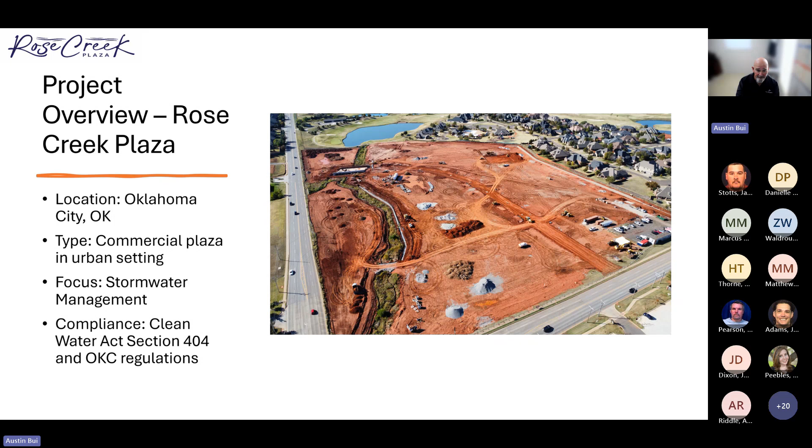The permitting process was long. Coordination with city departments took quite a bit of time, but once we got the stormwater plan into the city, it didn't take much time to complete the permits. The wins were streamlined approvals through proactive communication with the city and the Corps of Engineers, ensuring timely permit approval by getting everything done early and aligning project goals with city standards, which was crucial to keep things moving forward.

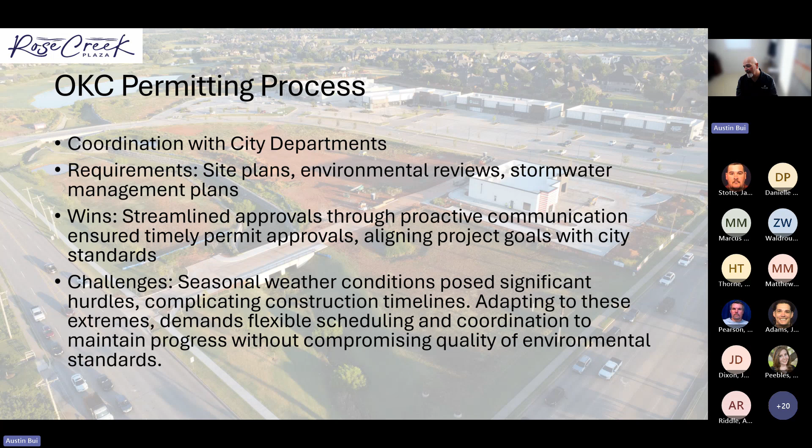Some challenges were the weather. We have seasonal weather here in Oklahoma - tornadoes, hot dry dust, torrential rains at times, and hail. We have a whole host of things trying to stand in our way. They pose significant hurdles, complicating construction timelines, but adapting to these extremes demands flexibility in the schedule and coordination with subcontractors and the city, so you have to maintain quality without compromising the environment, and that's where these standards really play out for everybody in the industry.

The Clean Water Act, Section 404, covers wetlands and upland sections of the permitting, and permit impacts to water downstream. Water that feeds out of this site feeds into the settlement ponds, feeds downstream, eventually getting into the rivers, and then ultimately back into a river, a lake we use for water, or back into the ocean. The environmental assessments, mitigation plans, and the U.S. Army Corps of Engineers gave us all the information up front, as well as the DEQ. The outcome is full compliance with minimal ecological disruption.

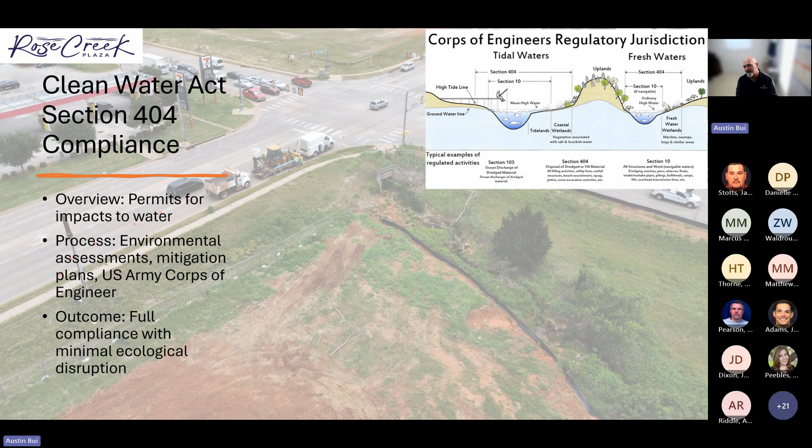The stormwater quality inspections are frequent. If you know about your stormwater compliance book, after every rain event of half an inch or more, you have to fill out your inspections. You've got to make sure you didn't have sediment leaving the job site. Regular inspections for runoff control are typically done by the on-site superintendent, and by the city or the state.

It's really about whether things are going to work out good for you on your job or not. We didn't really have a lot of play in our job. It was so big that we had to keep everything in place at all times.

If you look closely at the picture around the creek, it gives you a lot of details. As it runs down towards the bottom of the picture, it runs into the settlement pond at the country club, right under that little golf cart bridge. We had to silt fence all the way around the creek, all the way to the bypass crossing that we were allowed to put in to cross the creek.

Under the permit guidelines, you only have a small section of creek that you can work in. They gave us 20 feet on each side of the bridge to use as passage from one side of the creek to the other. We used sediment traps with monitoring throughout construction, and had to build settlement ponds throughout the construction process and then move them - it was quite eventful.

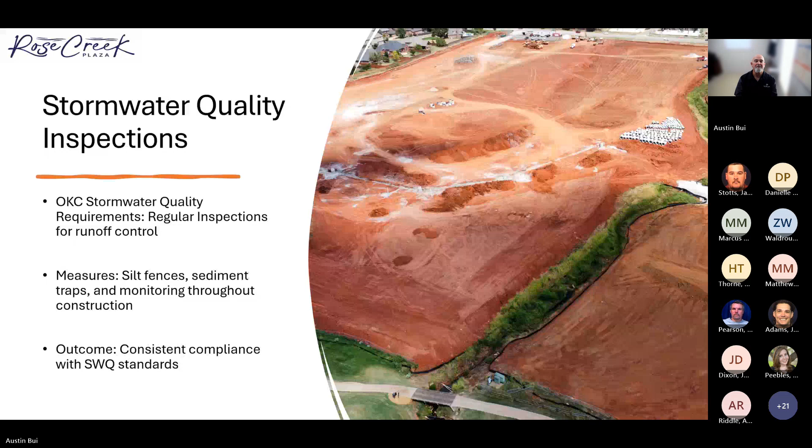Challenges - man, this job was challenging. There's a lot of complex terrain. When we got here, the creek was the lowest spot on the whole job, probably in some areas 12 feet below the level of the closest street, which was 164th in the top left picture, and that creek was probably 10 to 11 feet below that level. We had to bring that all up to level while maintaining the creek.

We had to run diversion channels through stormwater culverts to channelize the water while we did the build. It was very time consuming. The topography, the steep slopes, the flood prone area collecting water from the other side of the street with another site coming in, created a high risk of flash flooding. It was quite a build.

Well, we managed to get through it. Limited space for the infrastructure was really critical, so we had to pace ourselves on this job.

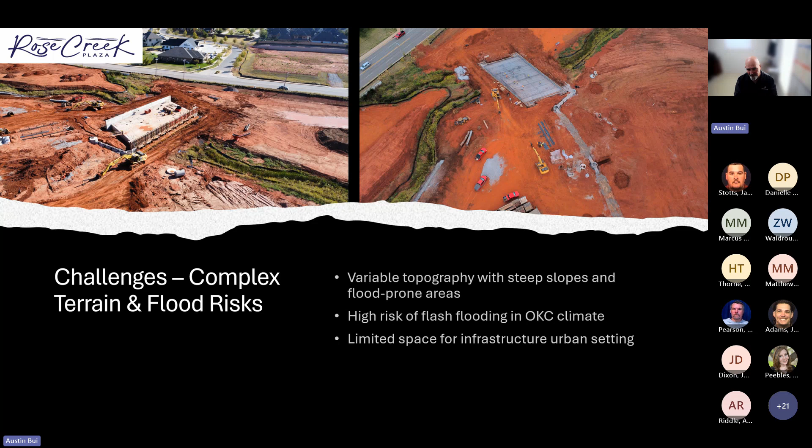Challenges in compliance and community were crucial. We had a lot of feedback with the community and prior knowledge of what they were going to require from us, balancing federal and OKC regulations, addressing neighbor concerns such as noise, traffic, mud, and dust control. These people didn't want to see mud getting on their brand new cars, or dirt coming out of the bottom of trucks while driving their kids to school.

Having a good construction entrance, and maintaining it, was critical. Construction logistics, managing timelines, access, and moving parts was a balancing act, but we managed to get through it. Melanie Lawson, our lead inspector at the time, would visit me often.

Sometimes it wasn't such a good message, but it was always the message that was needed. She was critical in making sure we implemented the staging and BMPs that needed to be put in, and she kept me on track. I can't say it wasn't bumpy, but ultimately we managed the timeline, the access, the neighbor concerns, the noise, and the traffic, and we kept the mud off the street.

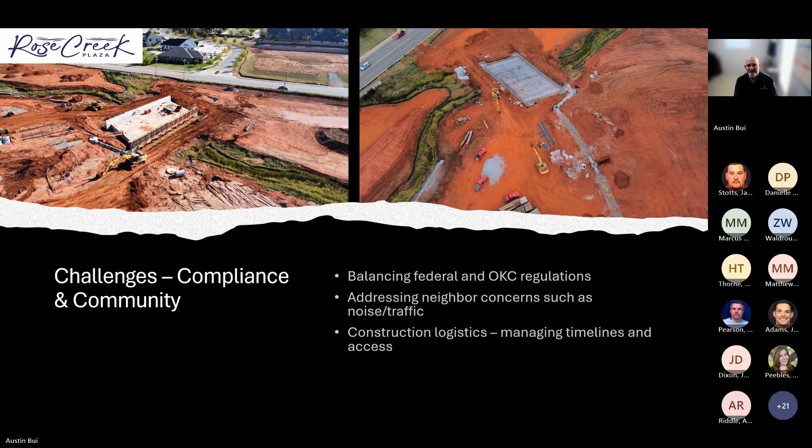Thank you to Melanie and the DEQ for all their help, we really appreciated that. It made this job really awesome to work on, and still awesome to work on. Now we have Mr. Weidman as our compliance inspector, and he also keeps us on track. Thank you to everybody involved.

The goals for this project were environmental and community benefits. We want to protect Rose Creek's water quality and the existing habitat. Through the creek there were fish, crawdads, owls, rabbits, and all kinds of wildlife whose habitat we've managed to tear apart and put back together in a better form, so we can manage the water safely under the bridges and through the job site.

We reduce the flood risk to the surrounding areas, the job site itself, and downstream. We enhance the site aesthetics and value to the community so they don't have to look at an ugly creek full of debris. The creek stays clean, the channelized water is safe, and it really makes a big difference to the site and the community.

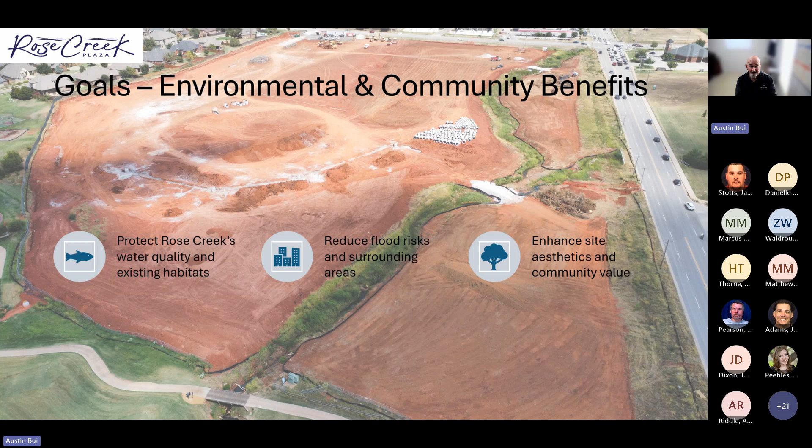The solution spotlight on this job was the gabion wall system in part - wire mesh baskets filled with local stone, which was an amazing story. I had never built a gabion wall before, only read about them and seen them on Corps of Engineers projects and other big civil projects, but never worked on one hands-on. As I learned about it, reading the engineering reports and learning how to assemble these things, I needed to know more.

As a good superintendent, I wanted to know more, so I started studying online, looking up videos, and ended up on YouTube where I found a company called Riverscapes. They had the exact same situations and circumstances, but in a marshy area. I watched the video and learned everything I could, trying to self-teach, then tried to teach the guys out in the field who were struggling to get the project done.

At the end of the video, since I watched it all the way through, there was a gentleman, the presenter, whose name and phone number was shown along with the name of their company. I contacted him, we met here on this site, and he talked me through the solutions, the concerns, and some of the risks we were going to encounter. It made the rest of the job flow smoother, much better.

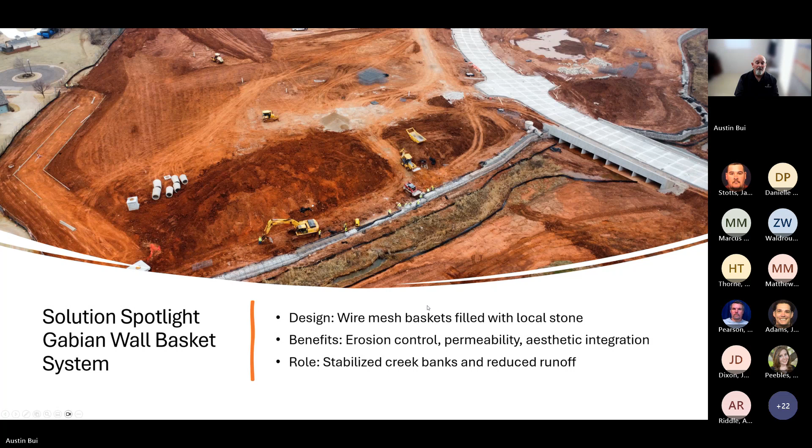The spotlight on the box culverts, which is the second part of this overpass, the reinforced concrete culverts for the water to flow through so that the cars can go over safely without erosion, was a huge job.

If you look at the picture on the left, that's what's called a mud mat. That mat is laid down underneath the creek bed, and it basically turns into the solid, stable surface that the bridge and the creek are going to run through, on, and over.

As you can see, the silt fence all around the creek. We surrounded the whole creek with silt fence and channelized everything into flood tubes that we ran around the side, and we'd pump it from one side to the other, keeping the water moving. Even on the wet days, we were able to manage.

By the time we got framed up and got the concrete poured, you can see the picture on the left. That's a 9-channel box culvert. It takes the water from the 100 acres that we service above, to the east of our project and south, and channelizes it down into the creek.

The reinforced concrete culverts help the water flow, keeps the pedestrians and the traffic safe. Flood prevention, infrastructure protection, ensures safe passage under the roads for the water and for animal life.

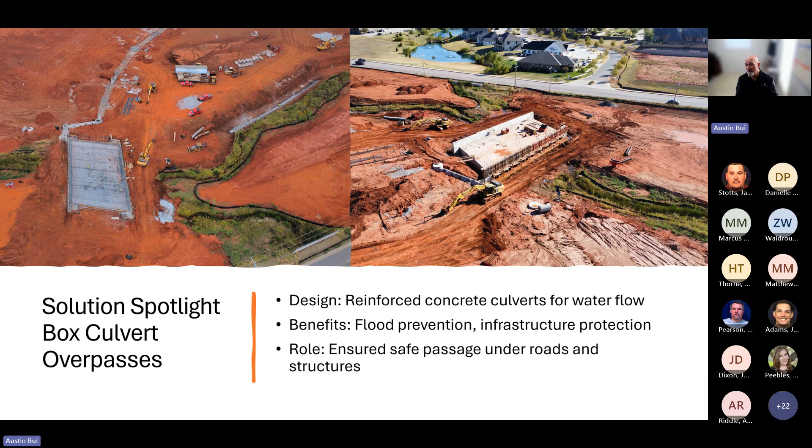The implementation, planning and permitting, the site assessment and terrain analysis was huge. OKC and the permitting coordination for Section 404 was a design collaboration with the engineers, the state and city regulators, Skybridge Construction, and Skybridge Construction Management early on that made this all happen.

As you can see in the picture above, this is an actual picture while we were pouring the private drive, which is now called Rose Creek Boulevard. Also at the very top of the picture, just below the homes—everybody knows those are Rose Creek homes, they're very valuable—we put in a landscape wall.

We put in drainage. We added all the utility infrastructure, water, sewer, gas, all at the same time while managing the site and keeping everything running smoothly.

If you look at the Gabion wall down on the left side, it's being built at the time, channelizing the water. We had to continue to keep stormwater BMPs in place to keep the water channelized even outside of the work area until we opened the work area for what it was to be used for.

It was a great big project. At times it was overwhelming, but it was very successful.

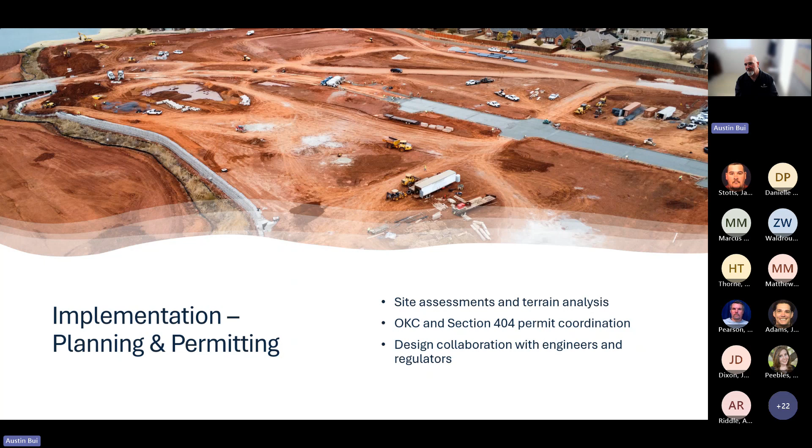Construction, stormwater quality measures, implementation—same situation, it's always continuing to move. We worked on the 9-box culvert above, which was at the top left of your picture.

The smaller box culvert, which was a 5-box culvert that goes through on the smaller road, the private drive there. You can see in the picture we're just getting that built, just above the mud mat, and still channelizing water around the work area.

The pile of debris you see by the cursor was a pile of all the trees that we cut down and removed from the creek itself. Under the 404 conditions, you cannot remove the root system from the trees, but you can cut the trees down at their base. So we removed the trees and put them in a pile.

We couldn't get a permit to burn the trees because there was too much, and at that time of year we couldn't burn them. So we brought in a mulcher and mulched all the trees down into a pile of mulch, and then used that mulch on the site later throughout the garden beds through our landscape contractor. We were able to use that material back on site.

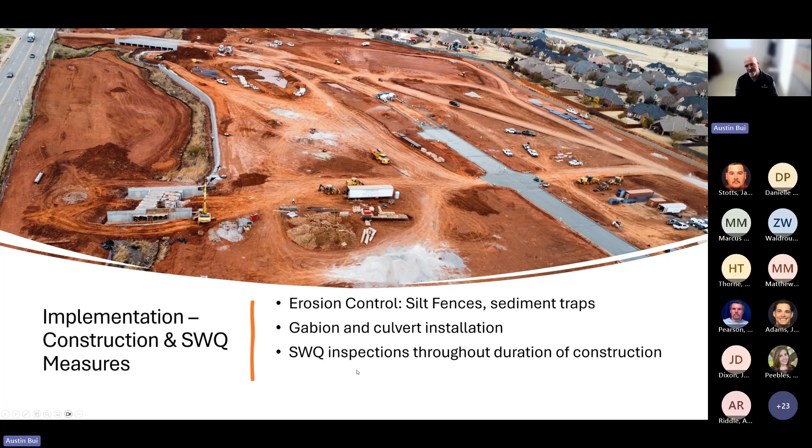So, takeaways on this, key wins. If you look in the background, Homeland is the anchor store at the very top of the picture, top center. The small building to the right is building 3, and to the right of that is building 2 and building 1.

That was lot 4. As we develop the site, you can see the pavement gets done, the landscaping goes in, the hardscape goes in, and the site becomes stable, working its way towards the creek stabilized and still in good shape. You can see the creek in all its beauty.

The 404 areas, which are the wetlands throughout the creek at both the top, bottom, and through the center, through the channelized areas, are in great shape. They host a whole bunch of wildlife.

We have hawks, we have turtles, we have rabbits, and all types of wildlife down there that are able to stay. As we continue to work, they'll stay.

We went from, I think, a 30% runoff efficacy to 90% runoff efficacy, which is pretty dramatic.

The stabilization was very effective at erosion control here. The Gabion wall system in place as a permanent solution, with the box culverts, really channelized the water safely through the site.

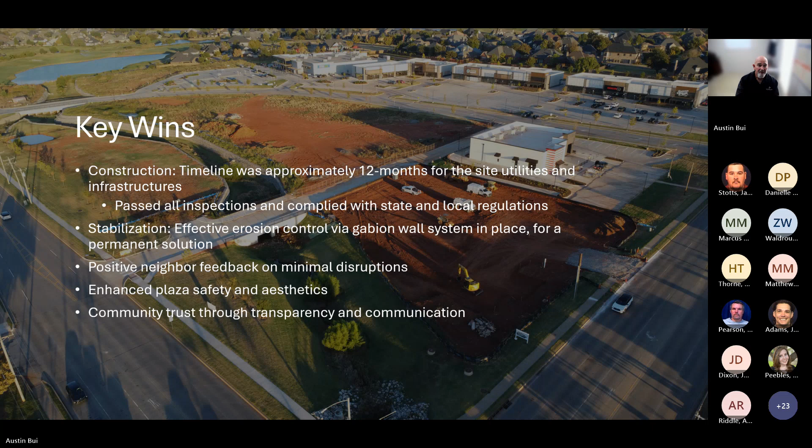Long-term performance is still to be seen. The project's Gabion wall, the box culverts, and the roads have been in service for almost 3 years now. They look better now than they did before—I think they're just growing into themselves. It's been able to maintain the water quality per the OKC and 404 standards.

This reduced flood incidents by keeping the water controlled, and it lowers maintenance costs over time by keeping the banks from eroding and rilling, so you don't have to refill and restabilize. It makes the job look nice, and it reduces flood incidents.

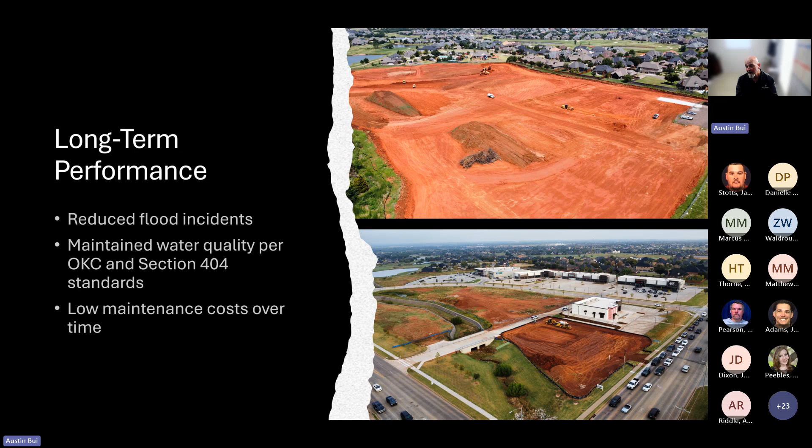Lessons learned and recommendations. We thought about this one long and hard. We wanted to adapt seasonal weather challenges into the job, but the weather here is very inconsistent. Sometimes it's hot, then it's cold. Then it's wet, then it's dry.

The OKC permitting, early engagement, being on the up and up with the city people, Melanie, Taylor, our inspectors - we built trust with them, they built trust with us, and we built trust with the community by being transparent and working together.

The next part is recommendations. We would recommend leveraging certified experts, engineers who know how to do these types of things for your future projects. Invest in certified erosion control inspectors. If you don't have one, check with your city folks - they offer classes, which is what I took to become an erosion control inspector through the state of Oklahoma. Then you can implement sustainable systems on your job for OKC's urban developments.

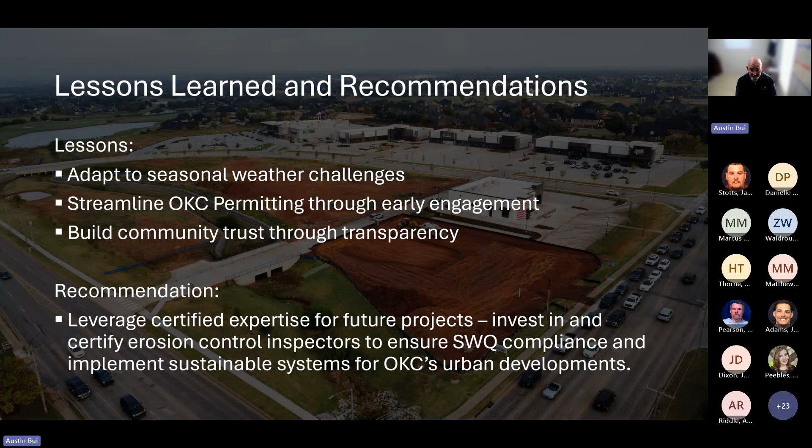So in conclusion, sustainable stormwater success at Rose Creek development came through a proactive approach, working in tandem with local, state, and federal jurisdictions, and a community-centric approach with the neighbors to minimize disruptions, build trust, and keep the site and the area clean in the community.